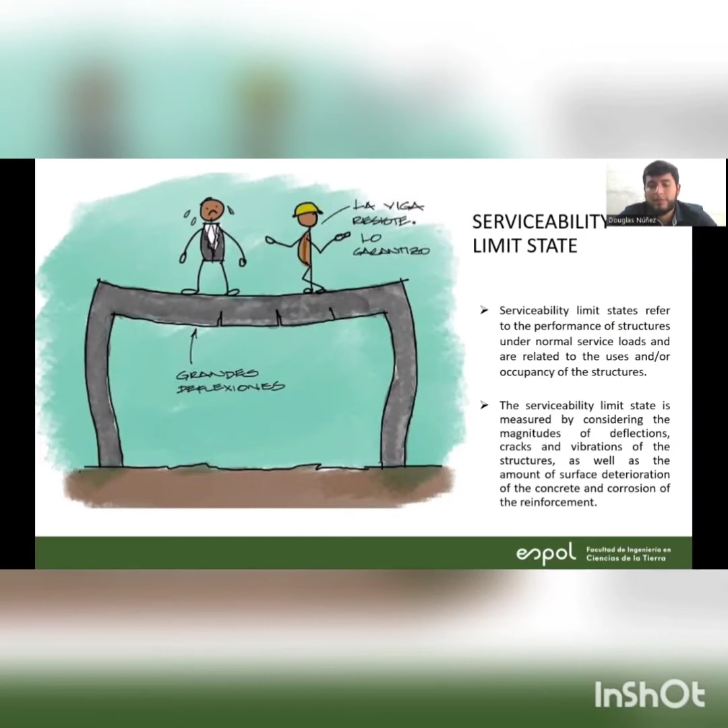It is very important to delimit deflection of the different elements to ensure good behavior of the entire structure as a whole under service load. When a careful study of deflection in reinforced concrete beams and slabs is not carried out, problems generally occur with windows, doors, and partition walls.

Excessive deflection in floor slabs can lead to cracking problems in partition walls, deformation in doors and windows, drainage problems in roofs, and malfunctioning of equipment and machinery sets.

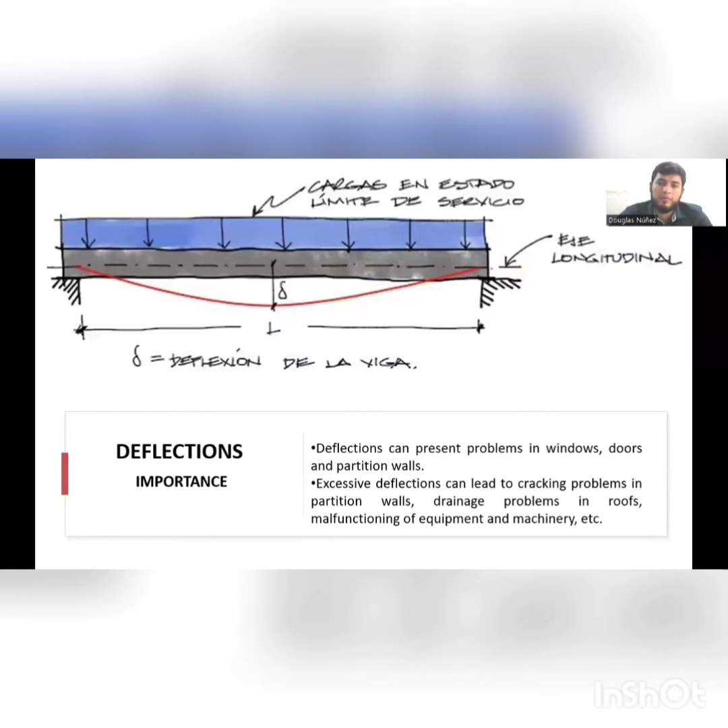Factors on which deflection depends. The final deflection of reinforced concrete elements depends on many factors, among which the following can be mentioned: material properties, degree of cracking, cracking distribution, the history of the structure or element under consideration, support conditions, and moment of inertia of the cross section.

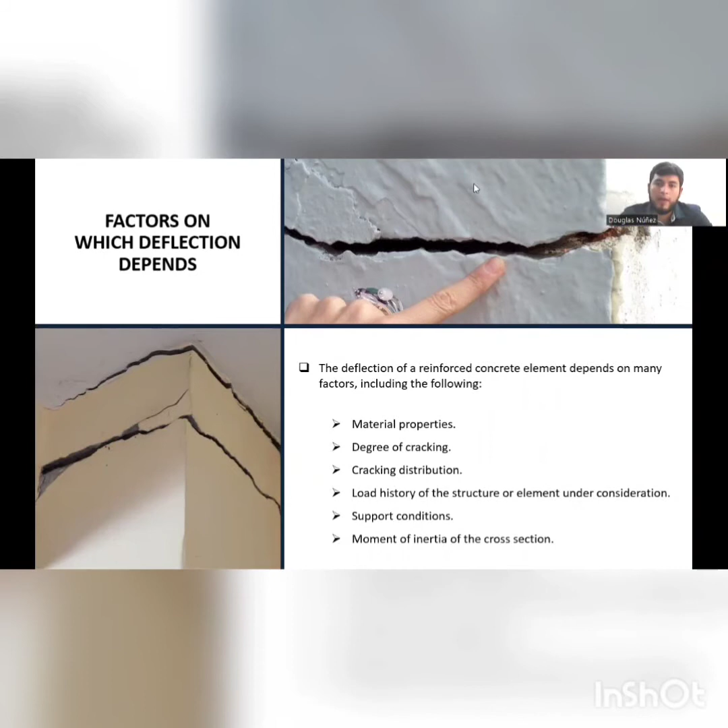The calculation of the deflection. It is easier to compute the deflection occurring immediately under the application of loads. This can be computed by the use of methods and formulas available for elastic deflection, by considering for the stiffness of the element the effect of cracking and steel reinforcement.

When values for the stiffness of the element, E and I, are not available, the ACI code in section 24.2.3.5 provides a procedure for calculating the effective moment of inertia.

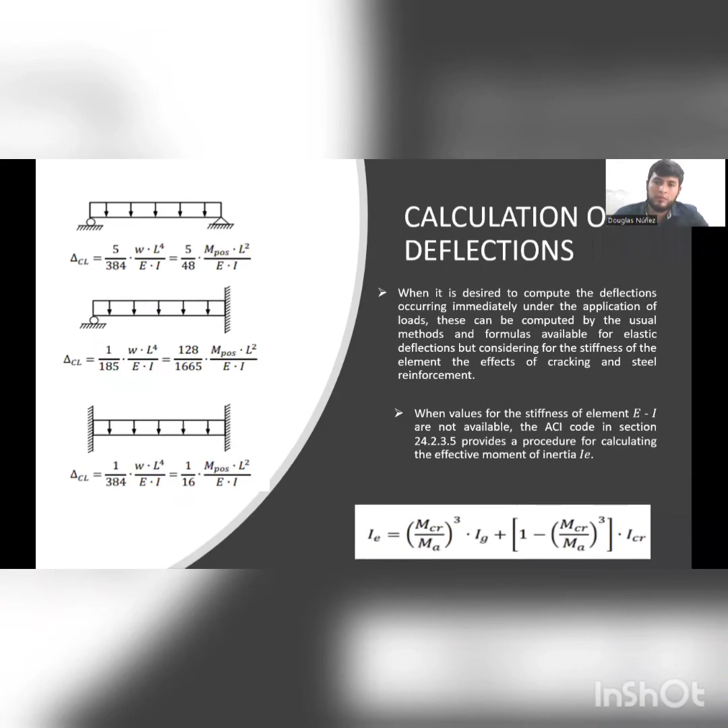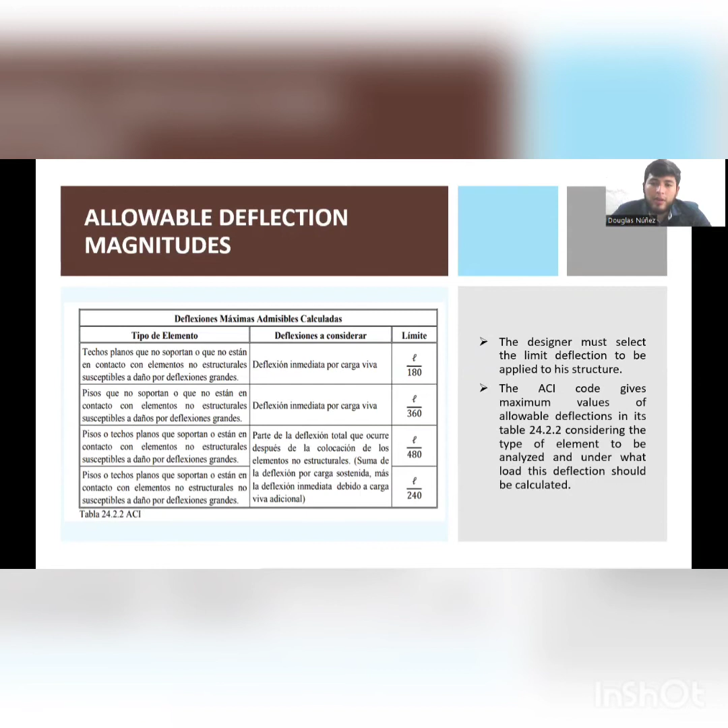Allowable deflection magnitude. The designer must select the deflection limit applied to his structure. The ACI code establishes maximum values of allowable deflection in table 24.2.2, considering the type of element to be analyzed and under what load this deflection should be calculated.

Cracks or fissures. In most properly designed reinforced concrete elements, there are cracks that are generally very small and almost invisible to the naked eye. Cracks can appear even when the element is not subject to design loads. They can be produced by the effect of shrinkage during the hardening process of the concrete. Cracks in reinforced concrete do not follow a definite pattern.

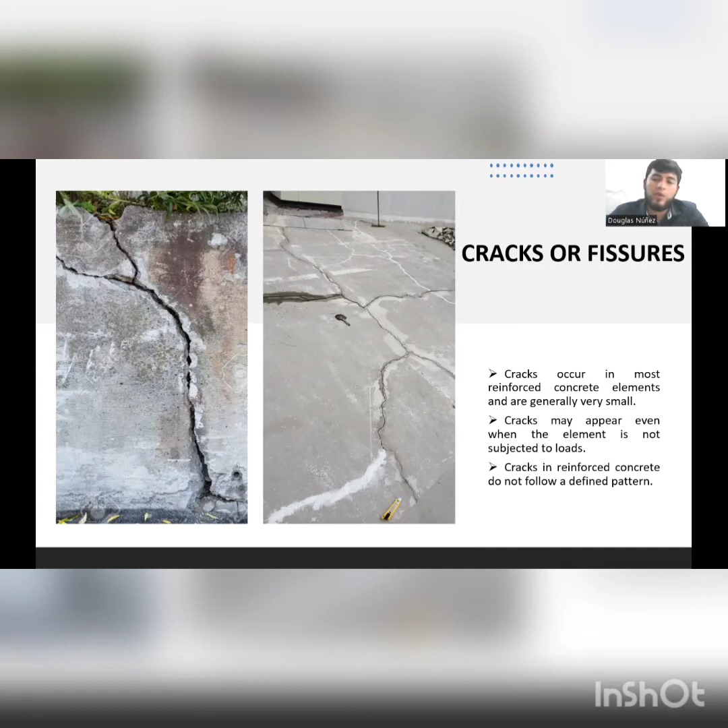Variables affecting crack width and distribution. Among the main variables, we have type of steel reinforcement, anchorage of the steel bars, tension in the steel reinforcement, bar diameter, cover of the steel bar, curing of the elements, placement of reinforcement, and finally thermal changes.

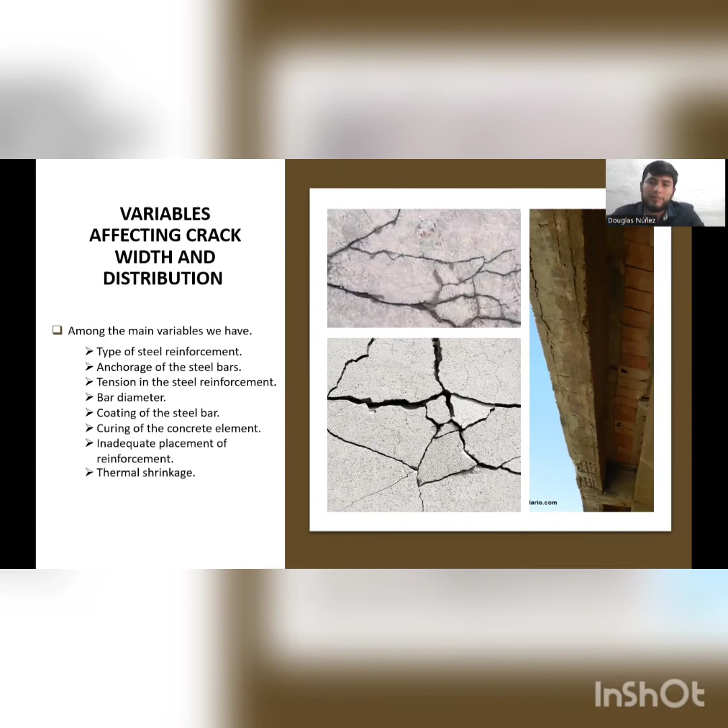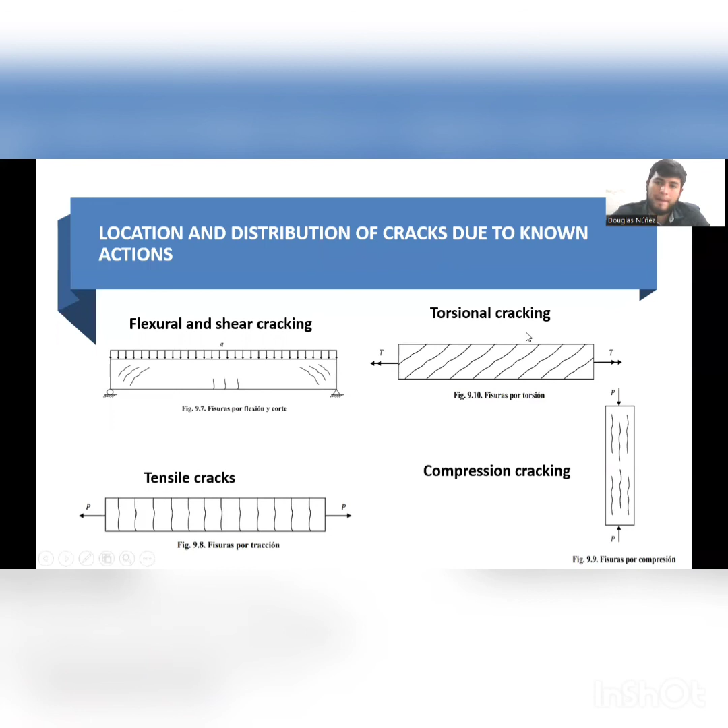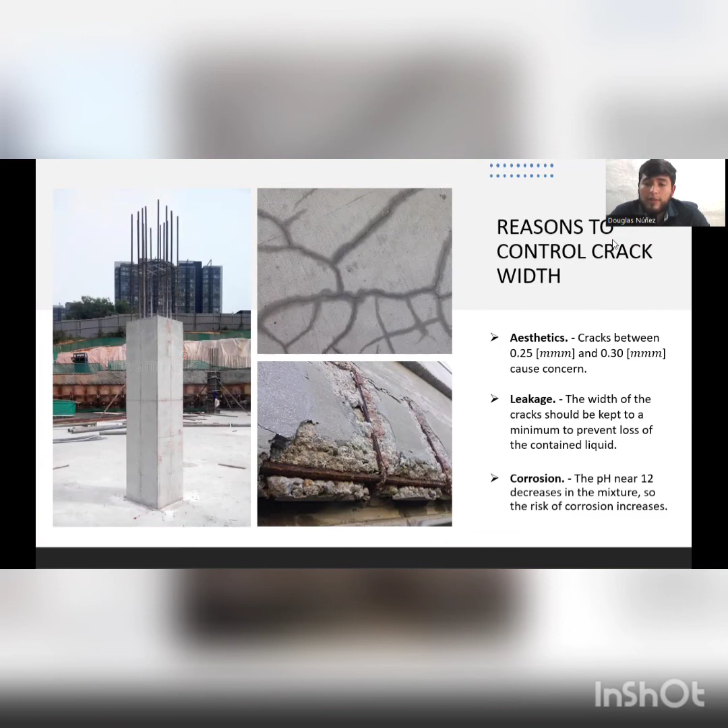Finally, reasons to control crack width: aesthetics, leakage, and corrosion. Aesthetics: cracks between 0.25 and 0.30 millimeters cause concern. Leakage: the width of the cracks should be kept to a minimum to prevent loss of the contained liquid. And corrosion: the pH near 12 decreases in the mixture, so the risk of corrosion increases.